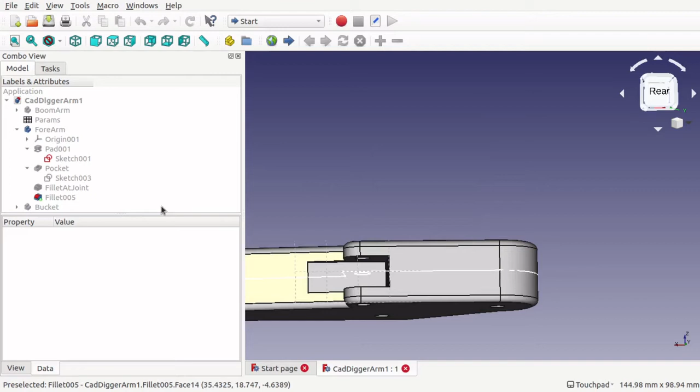So let's have a look at the bucket now. Let's hide the forearm and look at the bucket. Just bring that into view.

So I've got sketches on different planes in here. Let's have a look. So working backwards, we've got a fillet there, and then we've got the pocket, which is part of that sketch.

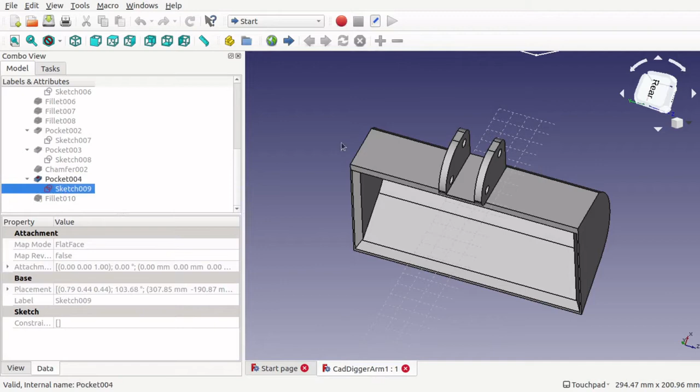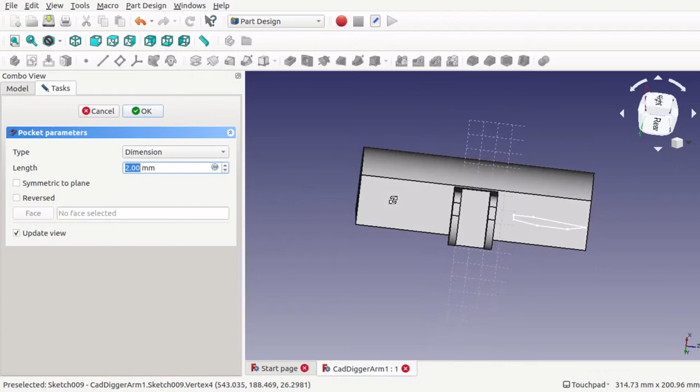Just confusing because there's nothing for that to pocket. I'm wondering if that's, double click on that, dimension of 2mm, so it's going 2mm this way. It's not actually really doing anything, so we can actually get rid of that, but it will kill this fillet here if I removed it.

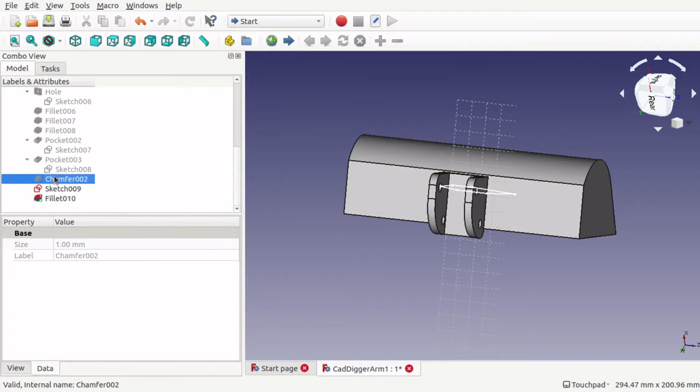So let's just delete that. Yep. The fillet is quite small, or this one here, as you can see. So there's the fillet there. So we can reapply that, so that's not a problem. Let's get rid of the sketch, get rid of that fillet. We'll reapply that. Got chamfer,

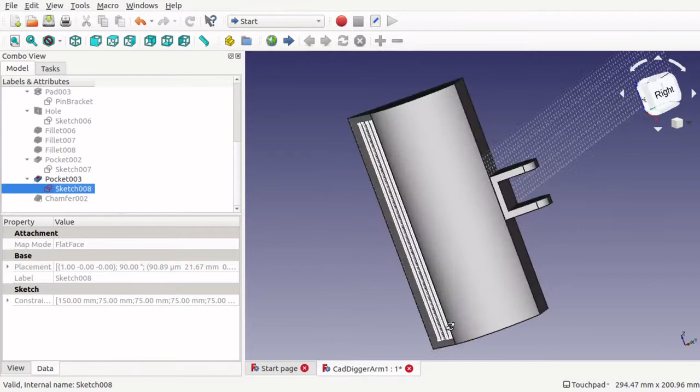pocket, and that sketch there, so let's make that sketch visible. Just hide. So there's that, so that sits on the bottom. So that sits on the bottom of, it's moving up.

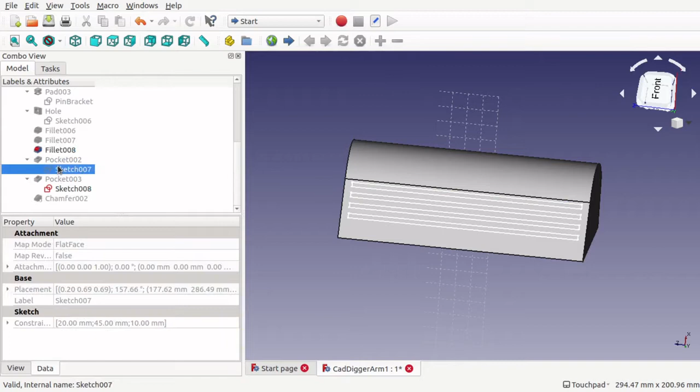Just show that sketch as well. So that's pocketing down through there. Go back to the fillet. So it's pocketing through that fillet.

3 fillets there. Another sketch there, which is a hole. So there's that sketch there, so let's hide the hole. So just made the fillet available there. Hide the sketch, so that hole, show the pad above it.

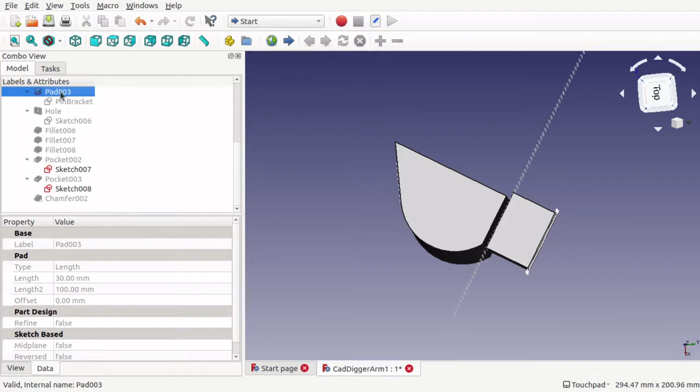So we've got pad, then in that pad, side of that pad, got a hole there, so you can see them there. Get rid of that pad. Now that pad originates from the pin bracket sketch.

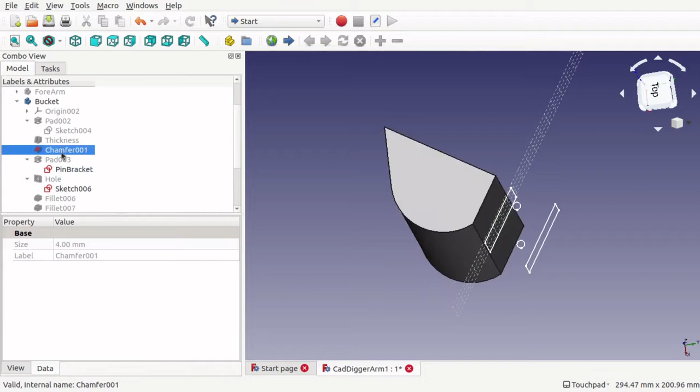That chamfer was a bucket, part of the bucket, it's part of the thickness. So where's that chamfer? Chamfer in there? There's that chamfer. So there's that chamfer in there. Thickness, and that's part of the sketch.

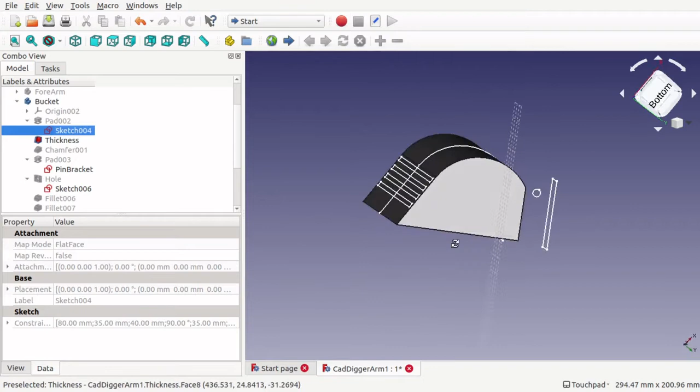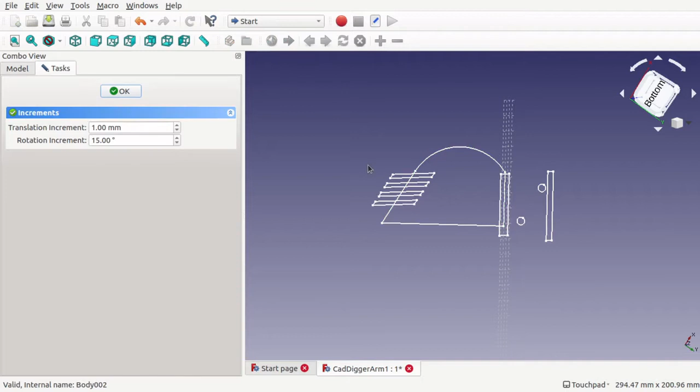So that sketch creates the pad, which is there. That's good, okay. So what we need to do is move this bucket, go on the bucket, right click, transform. So we need to move this transform into

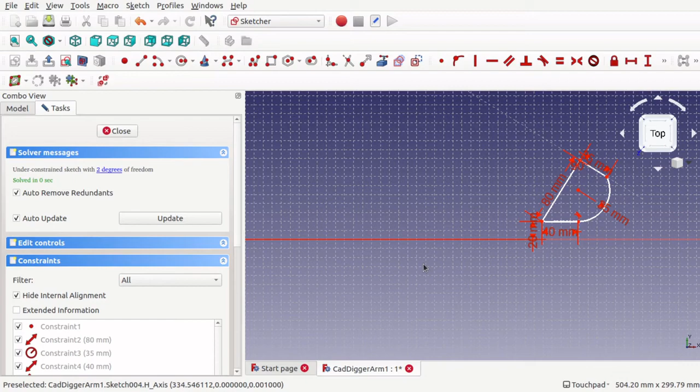one of these holes. Yeah, so this hole here, because the other one's connected to our piston. So okay, that, now we've got to attach those holes to this sketch, because what I want to do is move this sketch into place. So I want to attach this sketch to the point of origin, which is here. So we've got quite a way to go.

I don't want to pull them all over because I want other sketches to come with them. So first of all, we're going to notice the holes are separate sketches, so we're going to actually attach the holes to this sketch. So look at the holes. So what I'm going to do is hide the others, so I know I'm just dealing with those holes.

Right, so in order, we actually create the sketch for the bucket first. So create this sketch first, and then the holes were then created. So what I'm going to do is attach the holes to the bucket. And that should be quite easy, because what we'll do is jump into

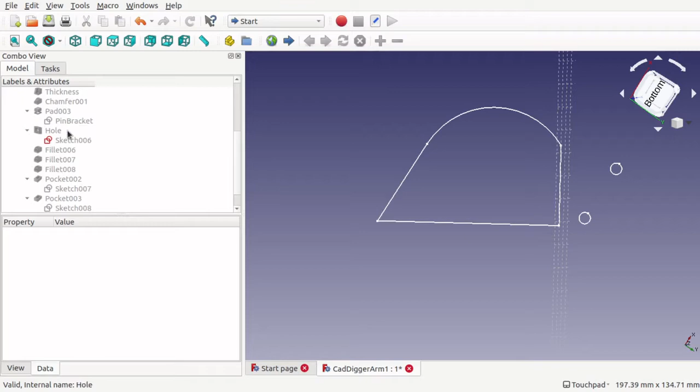the bucket pad. No, that comes first, so we've actually got to, can't do that because if I try to attach the holes to that bucket, then that wouldn't work because the holes come after the actual bucket.

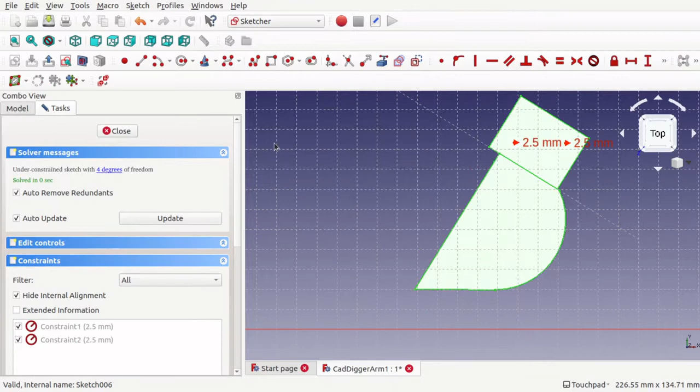So double click on the holes, get rid of that pad, and attach this to the bucket. So let's import the side of the bucket. So create an edge linked to external geometry, and I'm going to grab this point here and this point here

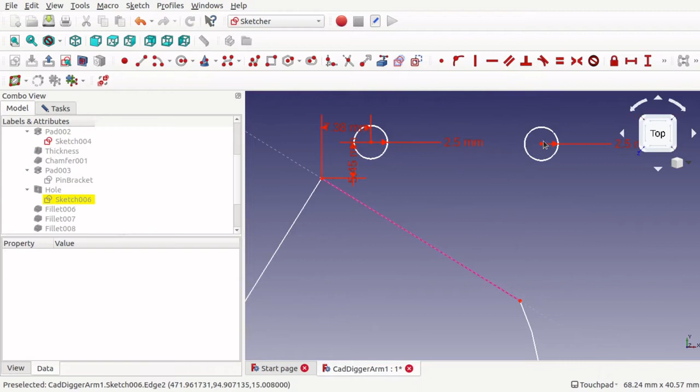and do a length and a height constraint on that. Just let them go for the height constraint. So that should be locked in position, and I'm going to do the same with this one, but for the bottom of the bucket. So there and there,

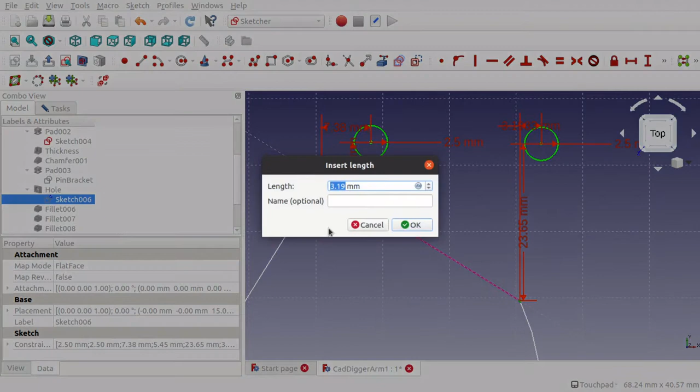length, and select them again. So that was the height. So fix the vertical distance. Now we're going to fix the horizontal distance. They've gone green, so they're fully constrained. So that's that part done. Now I can actually forget about the holes now.

Close that. Let's hide those holes. Let's have a look at the others.

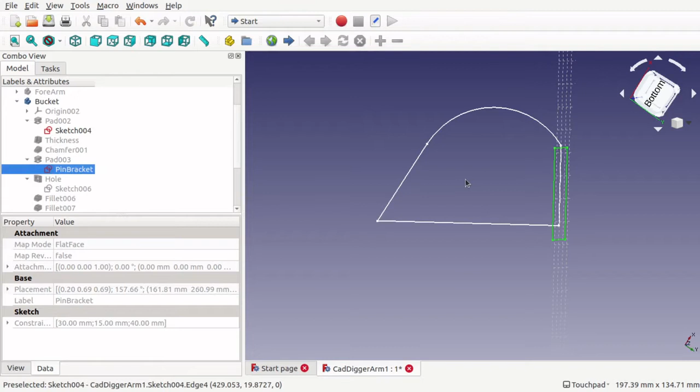So we've got other constraints on here that I need to lock down. We've got a pin bracket which sits on top of there. I'm working my way down now, so the next one is the pin bracket. Let's show the pad, so that sits on top of that pad and it sits on that plane, so that should be okay. Because if I look at the pad and the sketch, yeah, okay, that's good.

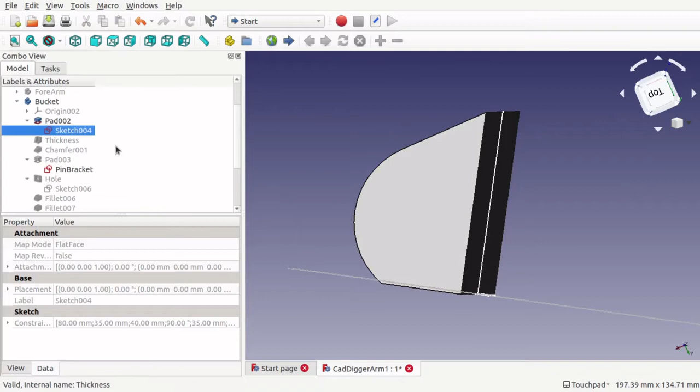So what we should be able to do is take that pin bracket and attach it to one of these sides. So we've got our pad showing, that's the only thing showing at the moment. All the rest have been made invisible because I've highlighted and shown the pad.

So I can double click on the pin bracket sketch, and I'm going to import this line of the pad in. And what I'm going to do is take this point, this one here, get it?

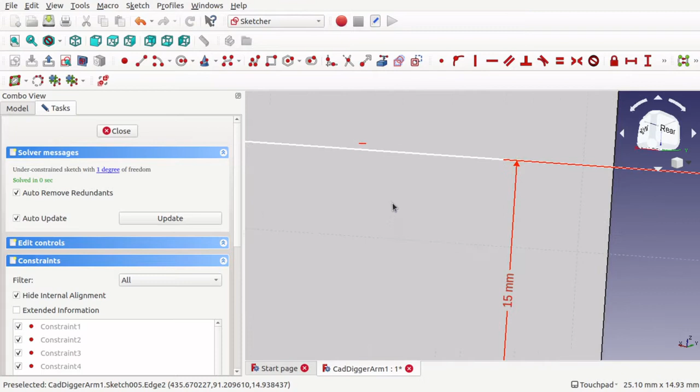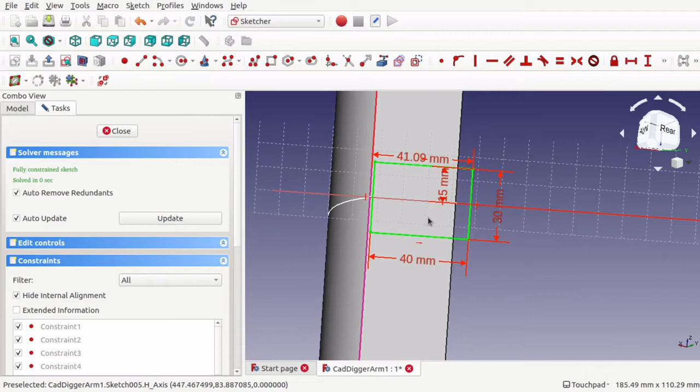And I'm going to create a constraint against this point here. So that one's locked down now as well. So that's good. Close that.

What else have we got? A hole sketch which we know we've done, so we can get rid of our pin bracket, we don't need that visible anymore. Now we've got the pocket sketch here, and that pockets through the fillet, fillet 7 and fillet 6.

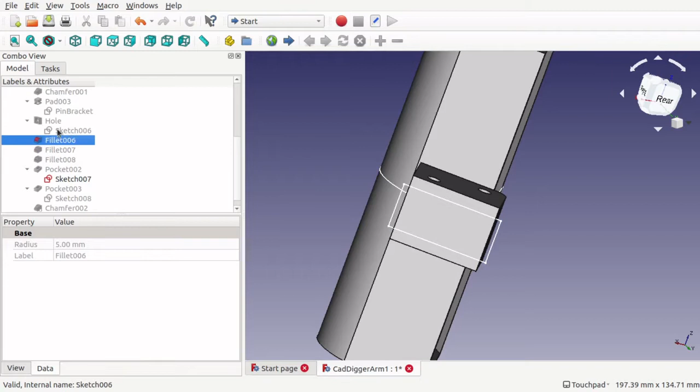If I work my way up, I can see I can attach it just to the pad. So if we look at how this is built, the fillets, fillet 7, fillet 8, I will sweep through with that pocket there. So if I go up to the pad, then I'll be able to actually connect that to something along there.

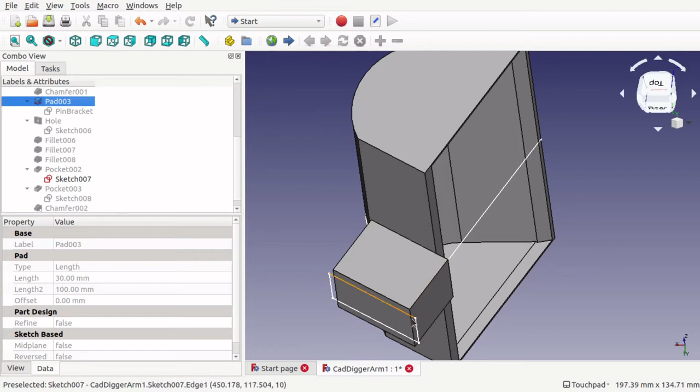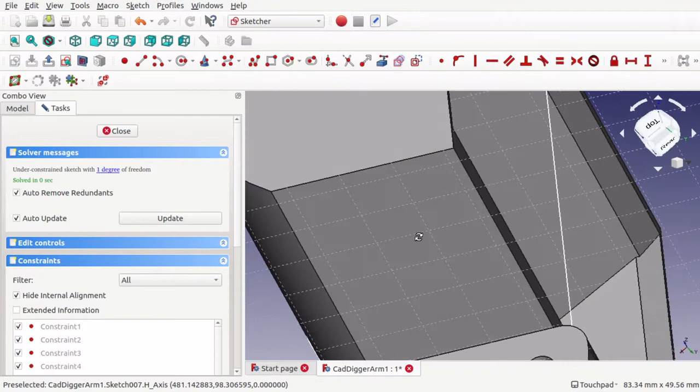So let's have a look. Looking at it, I think the best idea is actually to connect it to the pad because it's in line with that pad there. So let's do that.

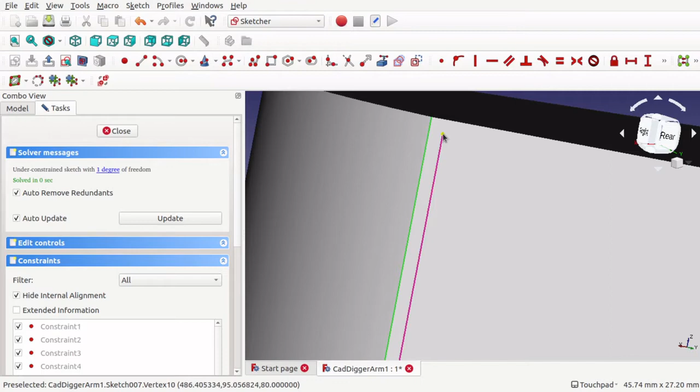So I'm going to import this line here. You can see that's actually imported, the purple line here. And we're going to just make a connection between that point, and if we zoom out and move up, zoom in to where my mouse pointer is, see that point there as well. So we've connected those and insert a length in there, and what should happen is that we've made this go green. So that's all restricted down.

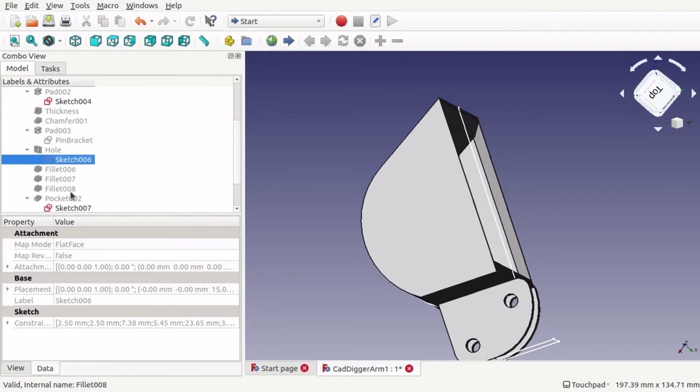Let's close that. I think we are there. So I'm just going to have a quick look at all the sketches. So when we've got move, I'm just going to hit Control S to save.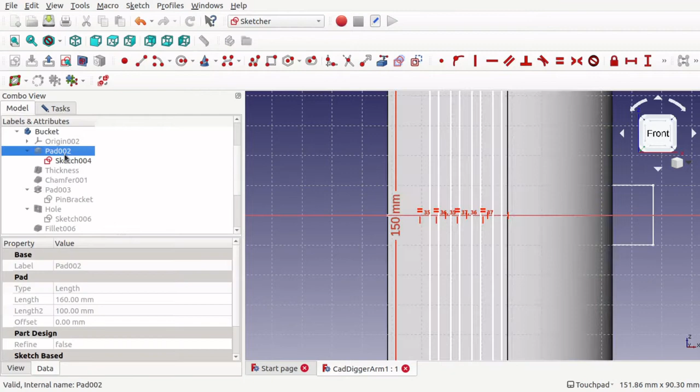Yeah, so all our sketches are done except for this one, and I'm going to bring this in. I know for a fact this is the bottom of the bucket, so I'm going to look at the pad, move up and import one of these lines. I'm going to import the edge of the bucket and then create a length constraint between those two.

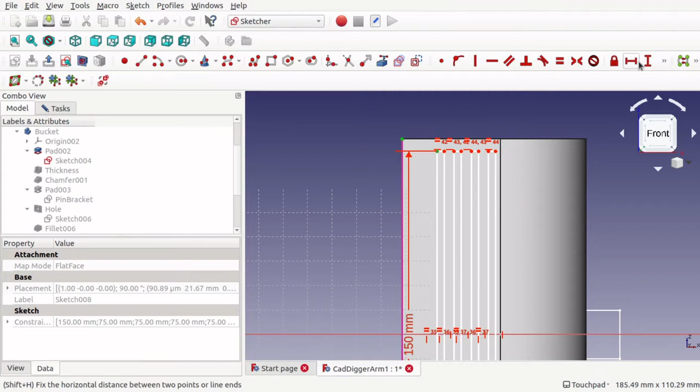There we go, that's gone green. So that's all good, that's all constrained down now. So we've got all constrained, fully constrained sketches everywhere.

So let's go back to our bucket sketch. What I wanted to do is move this into position. So I've saved. There's a 20mm height, which I don't want. I should be able to move this down into position. It's rotating a bit.

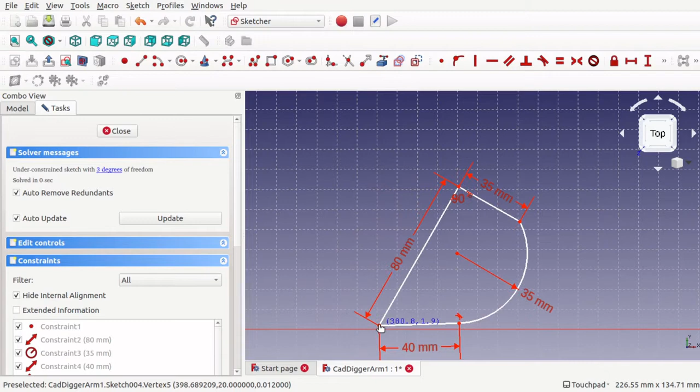Let's move that down close to that line, and what I'm going to do is attach that point onto that line. So that's the point of origin here, and the line coming out for that axis. I just want to attach that to there. I'm going to do the same with the other point here.

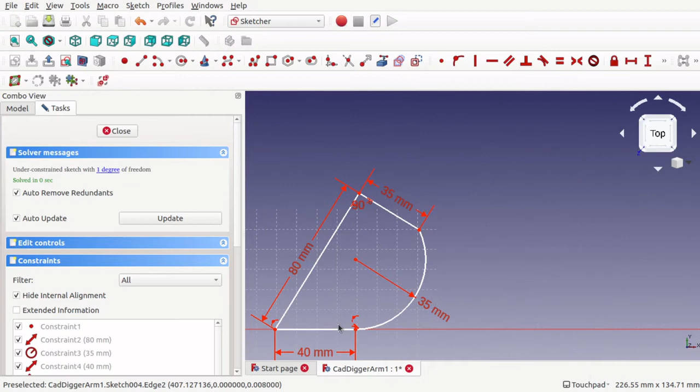Now I can slide this to the left. But I want to attach it to the actual holes that should have come with it. So let's make sure the holes have come with it. Where are we? Holes, they are there. So I can actually remove those constraints that I used just to move it over. So I'm just going to move that into position there.

I'm looking, and I haven't got any problems so far. What I'm going to do is just highlight the chamfer and see what's happened. You can see stuff has moved. So I've got a few issues to sort out there.

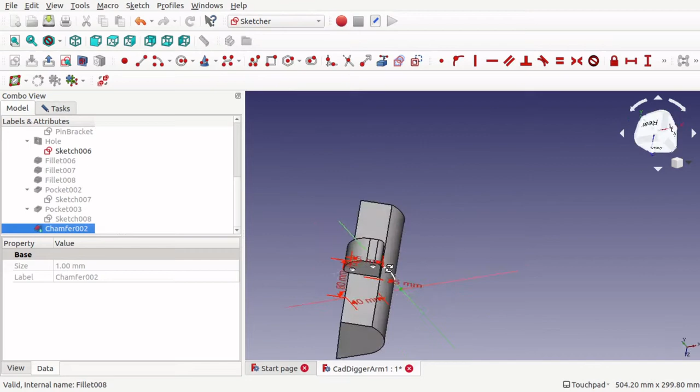It's trouble when you start moving stuff, the other planes actually disappear. So while that's still connected to the bottom, what I'm going to do is have a look at the other sketches, whereabouts they are. So we can see that one's moved.

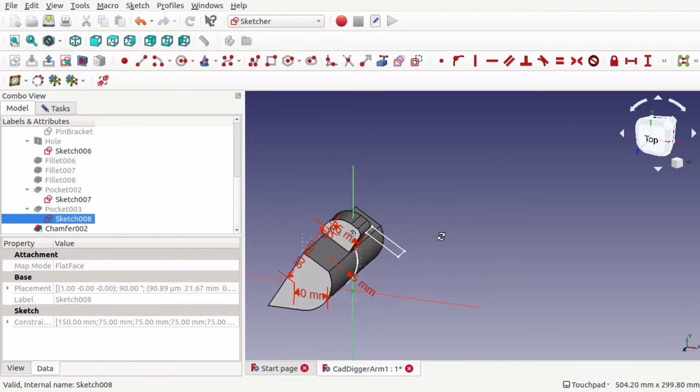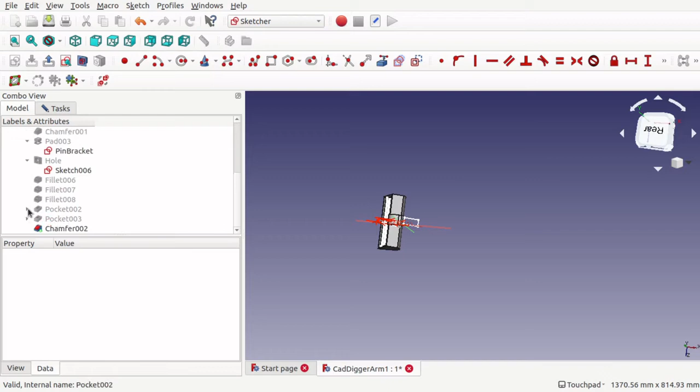PinBracket, all right, and our chamfer. Look, yeah, we've lost the bottom sketch somewhere. Must be hidden somewhere in this lot. Got a pocket, pad, chamfer. This one.

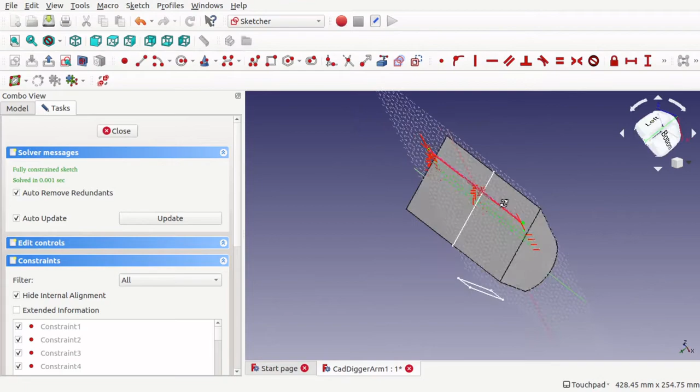Oh, that's interesting. It's actually inside. That's the reason why I couldn't find it. Looks like it's become detached from the face.

So I'm going to reattach that sketch. Go to model and look at the sketch for the pad, which is there. Hide the pad.

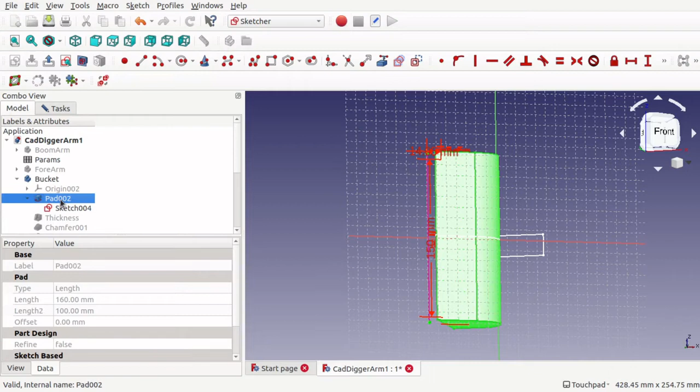What we need to do, if I show the pad and double click on this sketch, bring it to position. It's the wrong sketch. I'll click on this sketch, let's bring it to position.

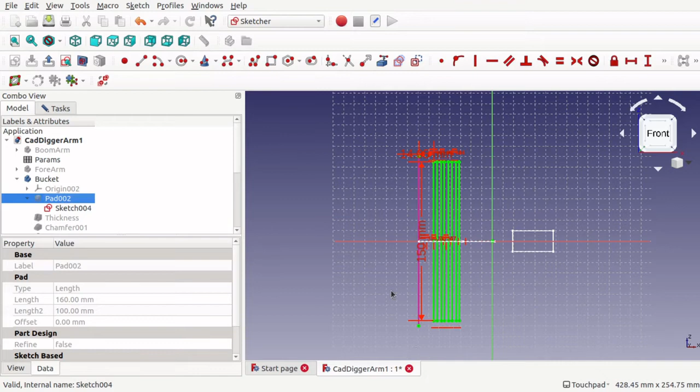There it is. So what I need to do is map that to a face. Let's close that. It's got a sketch. At the moment it's sitting in there. We'll map it to there. It's got a flat face at the moment. Just click on that, so you can see it's not mapped.

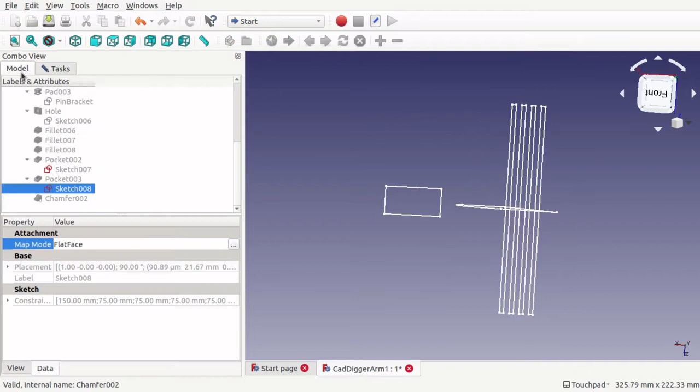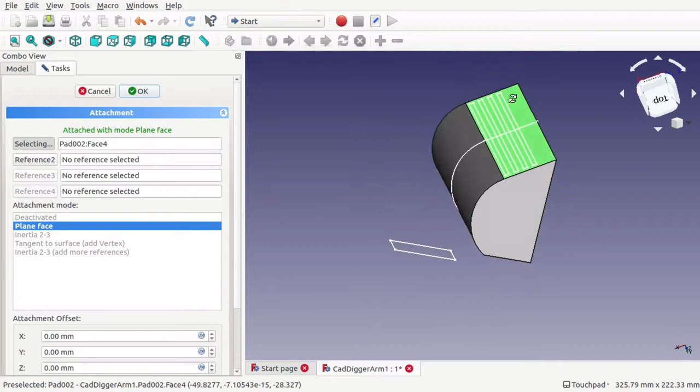Let's go up and find the pad. We're going to map it to there, so I've shown the pad, and sketch, click on the icon on the end, and we're going to select that one. So that's mapped it onto that position there. That's nicely locked down onto there. Okay, that.

And this one has probably come detached as well. So let's have a look at that one. So what was that? That was the top pocket there. What kind of mapping has that got. That's got flat face, and that's mapped face 2.

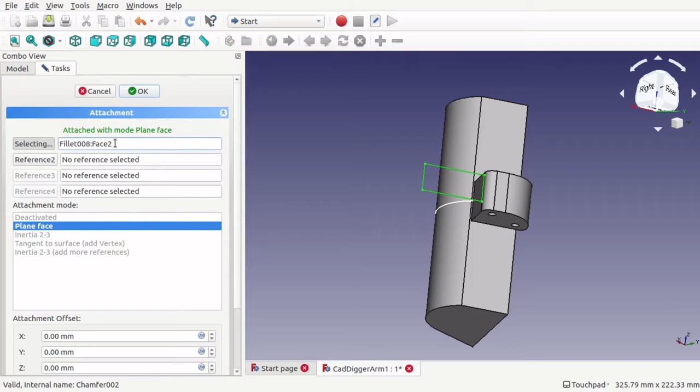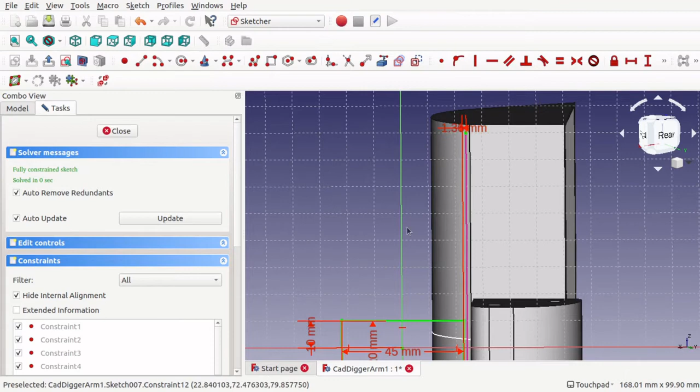Let's cancel that. Face is this. Double click the sketch in that pocket. We can see where we've imported that line. The sketch is seen to have flipped over.

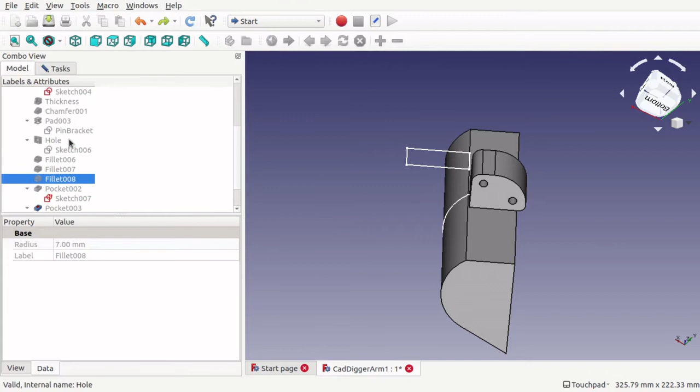So what I'm going to do is go back. Come out of the sketcher first, click on the sketch. Flat face, and we're going to map that. Go up and look for something flat. So, got our fillets, take the fillet off, take this off, have a fillet off.

Got the holes there, we've got the pad. So we use the pad there where we've been padded upwards. So I'm going to map that sketch to that pad. So pad face 20. Okay.

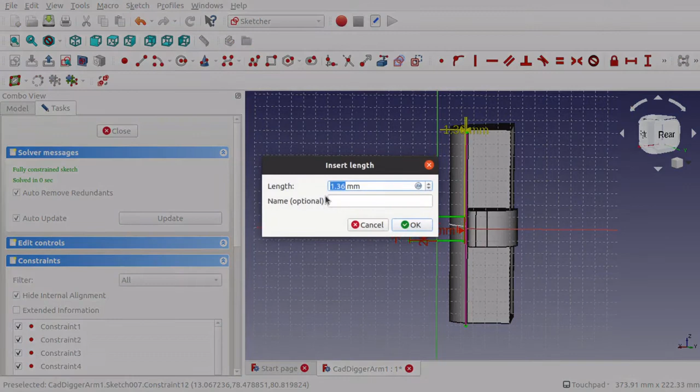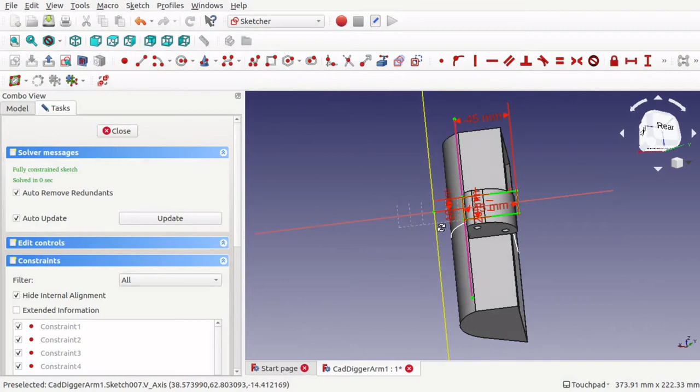That's mapped, but we still got to position it. So let's double click on there. And we've got this constraint at the top here. There we go, so that's there. Look at where that's going to cut through. Okay, so close that. And that's cut nicely down there, so that's all done and dusted, so that's good.

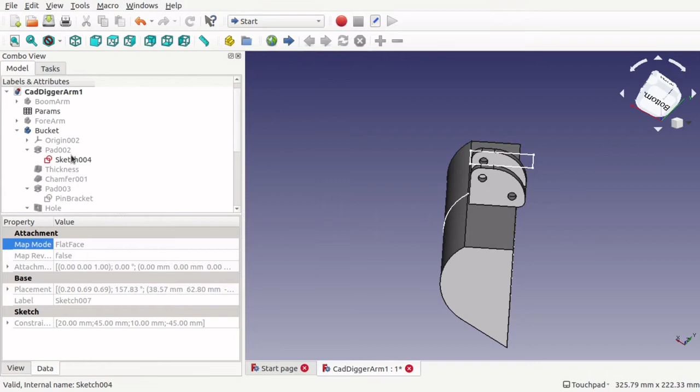Now what I'm hoping for is that if we jump back to our bucket sketch and we look down the screen, because we constrained it down here, so I could move it along that line. I'm just going to take those two constraints off. That's mobile now, and also I want to make sure my holes sketch is visible.

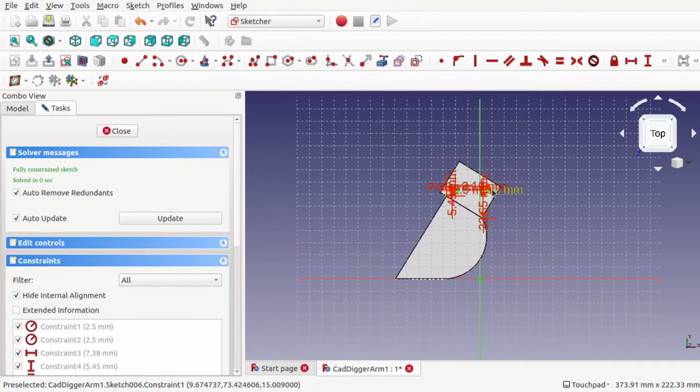Double click the hole sketch. Let's get rid of that pad. Yeah, that's good. I want to line up that hole with there, so we're going to have to do that from the pad itself of the actual bucket.

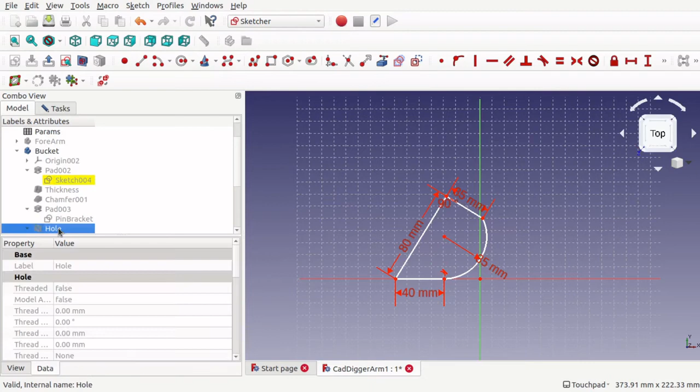So this is what sketch is. Make sure the hole is visible. Let's move this down. That's more or less there.

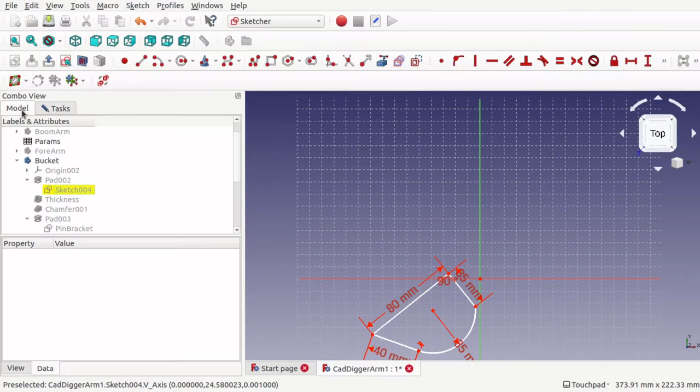What I'm going to do is come out of the sketch and see what's broken. So nothing has broken on that sketch, which is good. We're all still there. So look at the holes again. On sketch. Right, let's have a look.

Because the constraints are, because I want to constrain against these holes, and because the holes are created after this pad, it's a bit awkward because this sketch existed before. The holes to constrain, I have to actually constrain the holes to the existing sketch, which is the bucket. The trouble is I want to use the holes as my pivot point. So it's quite awkward to get those in position.

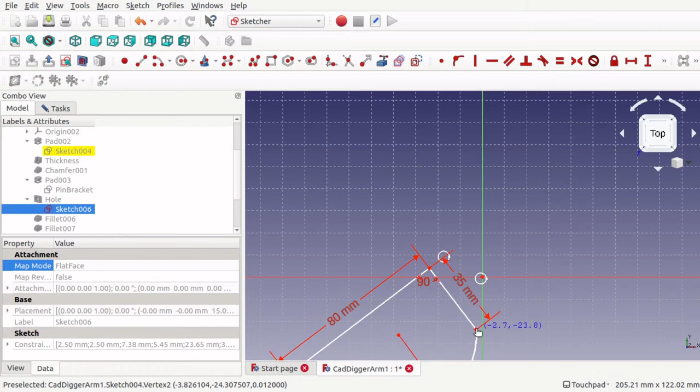Move this up slightly. That's good. I can create a constraint on this edge here. Now that's locked in position. Okay, save that.

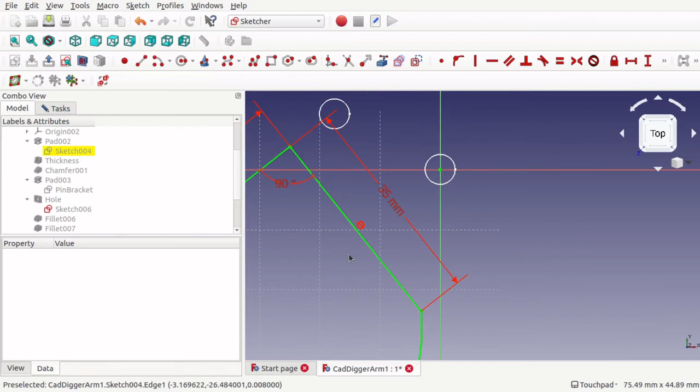And move down our bottom to the chamfer. Let's see if we've broken anything. Well, it all looks good, so that's all connected up.

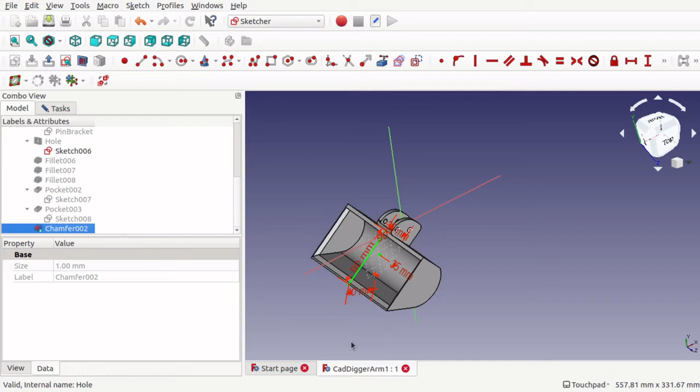So now we've got the digger arm, and what we'll have is our boom arm, now forearm, are all the points, the joining points, and though that's not how this should be constructed, all the main pivot points are in the right place.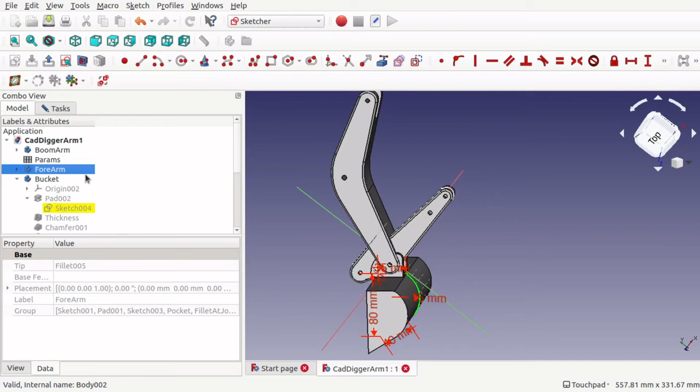So what I'm going to do now is save that, close, and I'm going to go into the A2Plus assembly, create new, save it, call this digger assembly.

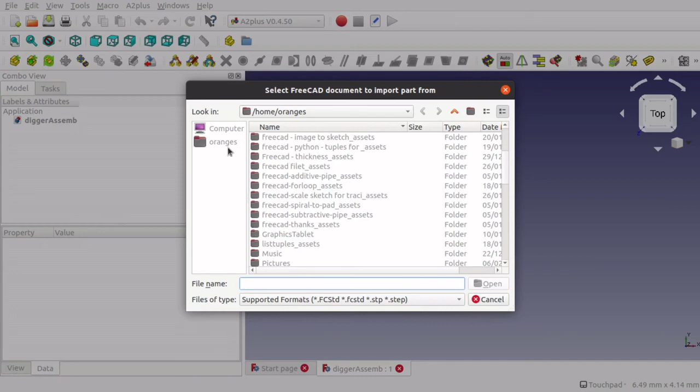And we're going to import those parts in. Add a single shape out of external file to the assembly. I'm going to find that file, which is in downloads, date modified, CAD digger.

So we've got a number of items in here. So I'm going to pull in the boom arm first, choose that, so the boom arm's in, to import the others.

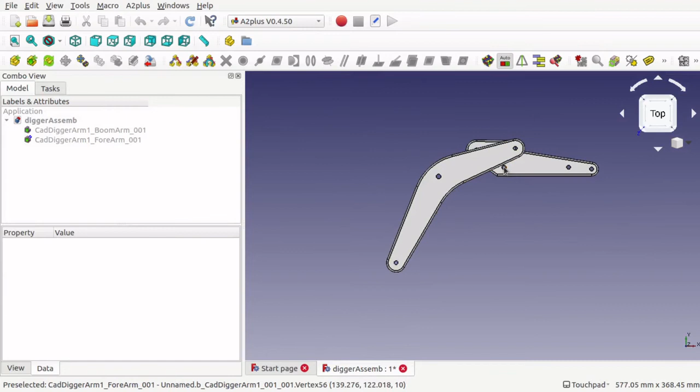Forearm, choose that, and we can place that, if it's there.

And what I should be able to do is right click, transform, which is right, so that's actually transforming along the right place there, and right click, transform on this one, which is correct there, so I can transform right place there. Makes life a lot easier.

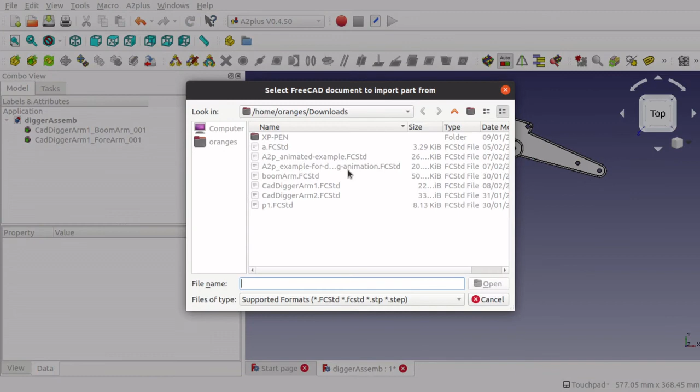Add our last item in, which is the bucket, and place it on the end there. Check the transformation, which is correct. So that's transformation is correct, I believe.

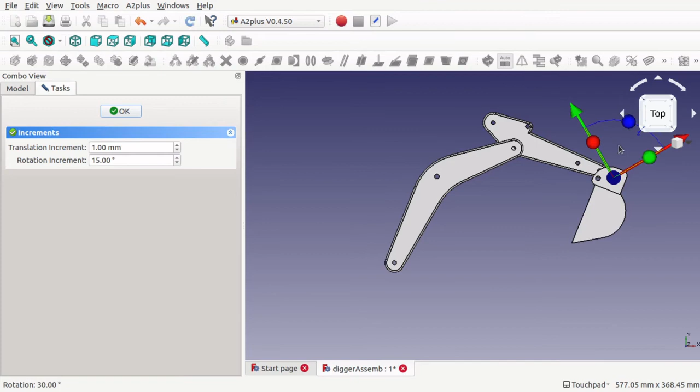Or is it? Should it be the other hole? I think I've picked the wrong hole. That'll do for now anyway. So that's correct, we'll go for that for the time being. Here's the other hole, isn't it? Damn it. Oh well.

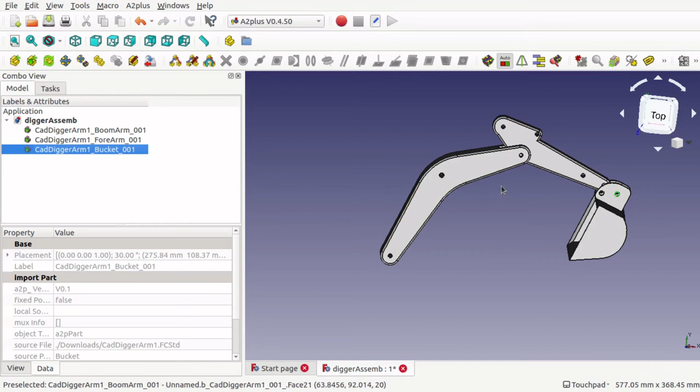So now we need to link these together. So we'll move, first of all we'll move this away, transform this away, and we will pick, if I zoom in, we'll pick this circle around here. So okay on that transformation.

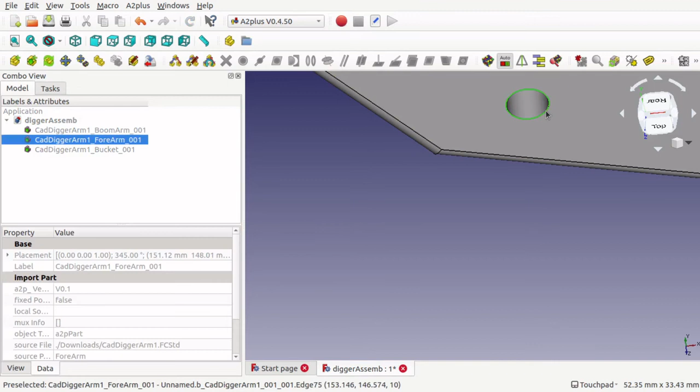Click this circle and move over using my arrow keys to move, using Alt to flip this around, just using page down and page up to zoom out.

Now I can hit control, select this one, so these two are selected, and I can use a circular edge constraint between the two parts like that. That's good, set that, and then we'll do the same with this circle.

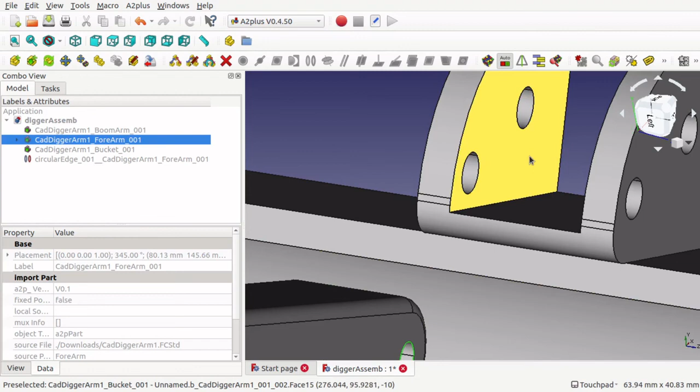And move that down, and I'll look at the bucket, and it's got to go inside here. Now our pivot point is, no, it's the wrong one, but we'll use it for the time being. Well, it could be the right one, I'm not quite sure.

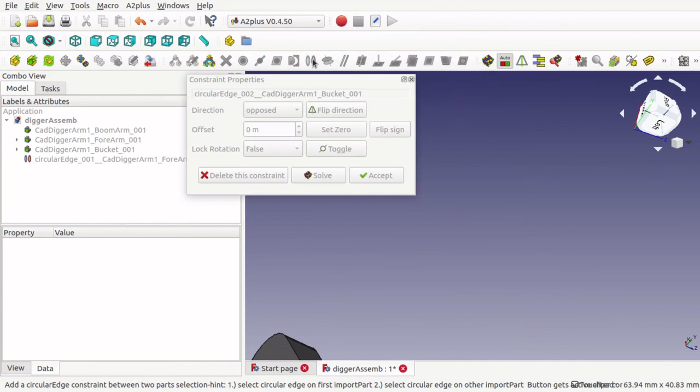And we want this hole here. Hit control, those two are selected now, and we'll connect those up with a circular edge constraint. Can't see what's happened there, let's zoom out a bit. That's looking good, set that, and now if I click on my move, I should be able to move the arm.

And also if I want to change the angle of this one here, the bucket, I can actually come down and look at the placement, look at the angle, and change that angle on there. There we go. So that's changed, and I can do the same with this one here.

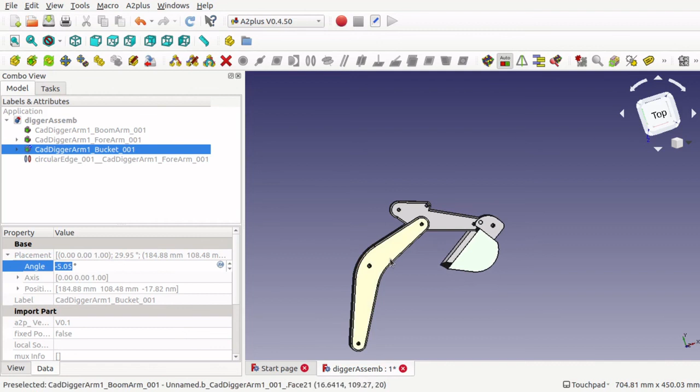Change the angle, but what we need to do is click on the Rubik's Cube to allow for any adjustments there. So that's good, so that's done.

And we can just put some Python behind here to actually animate it if we so desire. And I think we'll leave that for another video.

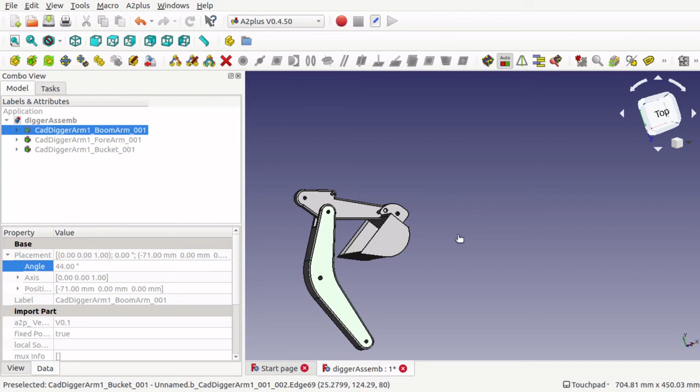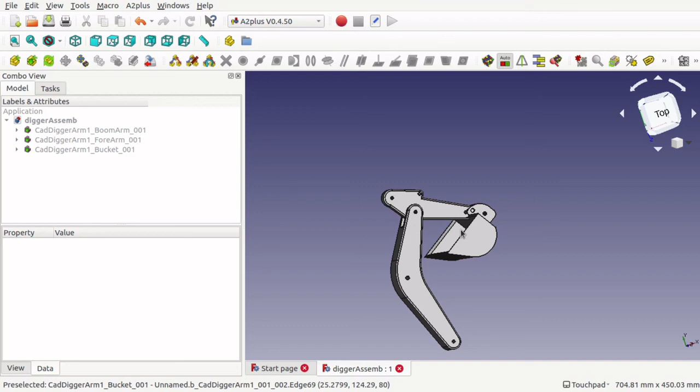I'm leaning towards actually doing a widget based macro where you have this interface that pops up on screen, so you can change the different angles of the different parts, so a different angle for the boom arm, the digger, bucket, or the actual forearm, so we can actually move it on screen with sliders or buttons. So I think that's the way I'm leaning towards, so I'll actually be putting that together and going through that in another video.